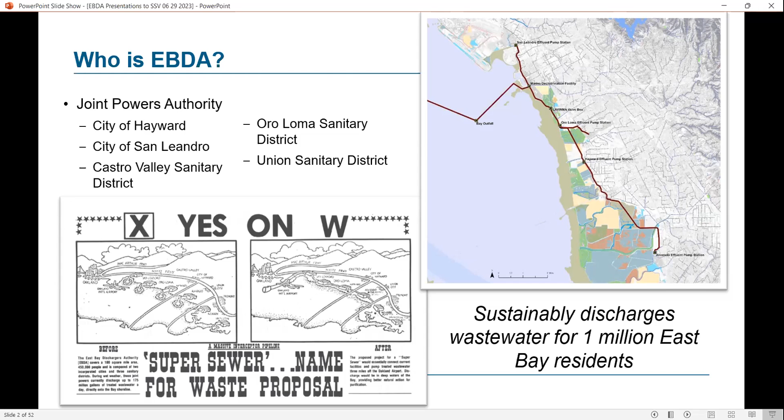Each of the treatment plants along the Bay Shore used to discharge treated wastewater directly to the bay, and this system was created to transport that sewage through a 7-mile outfall into the deepest part of the bay where there's additional mixing. But we're returning to more of a near shore discharge approach in certain elements, and we'll talk about that later today.

So we're going to start by talking about the Cargill partnership, and I'm going to turn it over to Don in a moment. Then we'll take some questions on that project when we get through the presentation, and then we'll move on to the horizontal levee project where I'll co-present with Heidi. So that's the run of show today. And with that, I'm going to turn it over to Don for an explanation of the Cargill EBDA proposal for enhanced processing and removal of mixed sea salts.

Thank you, Jackie. I just thought I'd give just a broad overview. Some of you may not be aware of what Cargill does. They are an ag, food, financial company, also work in the industrial sector, have operations in about 125 countries. It is privately held. The company was formed in 1865. Mr. Cargill bought a grain elevator, and his descendants are the current owners of Cargill. So over 158 years, we've grown to 155,000 employees.

And our purpose is to nourish the world in a safe, responsible, and sustainable way. And in fact, this project that I'm going to talk to you about is an example of that purpose. In the agricultural sector, we buy grains and oilseeds from farmers. In food, we supply food ingredients, sweeteners, texturizers. And in animal nutrition and protein, we provide feed, we provide protein products, beef, chicken, turkey to food customers, and financial and industrial is where our sea salt business is, actually part of the food business and the industrial business. So next slide.

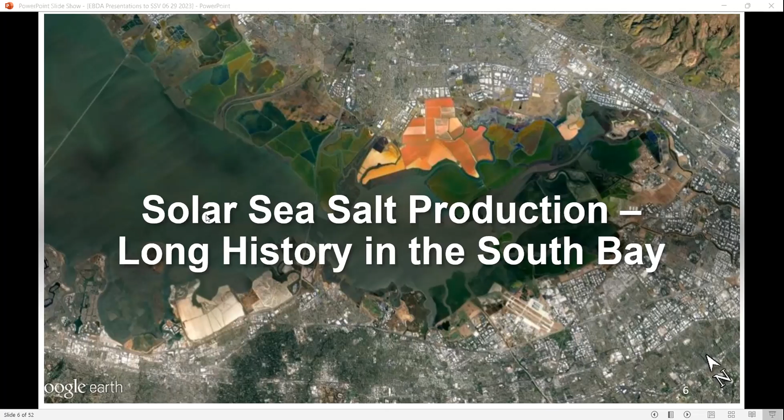And so we try to be good stewards in the Bay Area over the years. Leslie and Cargill have conveyed over 40,000 acres of shoreline property to federal and state agencies over the past 50 years. And the facility actually operates within the Don Edwards National Wildlife Refuge. So we go to the next slide. So that is a brand that Cargill operates for their salt. We don't have a lot of direct to consumer brands, but this is one of them. So if you see Diamond Crystal Solar Sea Salt in the store, it probably came out of our Newark facility.

So I thought I would, on the next slide, help you understand what the project is all about. I was just going to give a very high level overview of how you produce sea salt. It's a completely natural process. We only use the sun and the wind to evaporate seawater, which we pump in from the bay. So essentially where that X is, we bring in bay water and it moves through a series of ponds. The sun and the wind evaporate the water and the salinity increases. And then we move it to a next pond.

And so it goes through those rose colored ponds until you get to those green colored ponds which are called pickle ponds. And it's another name for increasing the salinity of the bay water that's in those ponds. And finally, those orange ponds is where we pump the brine into, and most of the sodium chloride will precipitate out, and it will settle to the bottom of the pond.

We pump out the remaining brine and harvest the sea salt. So the resulting brine, or leftover brine, we circulate that through the system again. But another product that we then extract, which is in those aqua colored ponds, are mixed sea salts. These are all the salts that are still left after you've removed most of the sodium chloride.

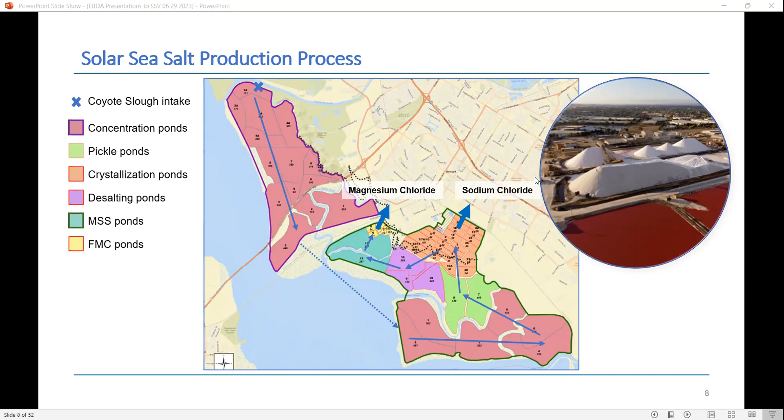But we realize that after we get as much out, we probably aren't going to be able to commercialize the remaining mixed sea salts. So that's what this project is all about. And as you can see, those ponds are fairly close to the bay. And so as part of our sea level rise adaptation plan, we're looking at removing those mixed sea salts from those ponds. So how do you do that? Before the Clean Water Act, we would discharge brine back into the bay, but we're no longer allowed to do that. So why don't we go to the next slide?

So again, this is part of our proactive sea level rise approach. Climate change, we realize, is going to impact all of us, and so we want to act before it becomes an issue. And so a part of our sea level rise adaptation plan is to remove those mixed sea salts.

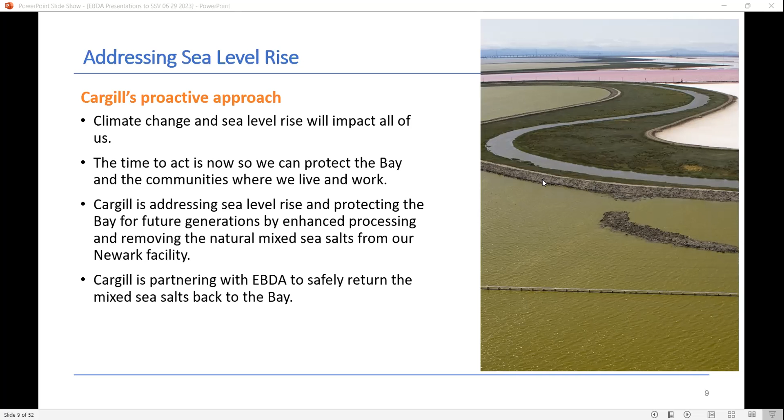And since the process that we have is completely natural, we don't bring anything into those ponds that hasn't just come from bay water. So it's completely natural, but we don't want this large inventory of these highly concentrated salts sitting near the bay. So this is why we're partnering with EBDA to safely return those mixed sea salts back to the bay. We'll go to the next slide.

You know, we looked at other options other than working with EBDA, and EBDA was clearly the most sustainable way of removing those mixed sea salts. I mean, we could have tried to truck it to a landfill or inject it into an underground well, or we looked at even putting it on a barge and sending it out, but none of those were really practical ways of removing the mixed sea salts.

And the advantage of working with EBDA is that we've got to dilute these mixed sea salts before we discharge them into the bay. We've got a large supply of wastewater effluent that we can use to dilute the mixed sea salts and then return them out into the bay. Why don't we go to the next slide?

So this is just a high level overview of what the project is all about. We will pump in some additional bay water in order to dissolve those mixed sea salts. We'll then send them through a pipeline that will connect with EBDA's wastewater effluent system. And then when it's mixed with all the wastewater effluent, it'll be diluted actually below the salinity of bay water. And then they can be safely discharged into the bay.

And so the challenge is we've got to get those mixed sea salts to the EBDA system. And so what we want to do is build a pipeline from our facility in Newark. It's about 17 miles or so up to San Leandro, where we want to connect. And we're looking at having a project labor agreement to build the pipeline.

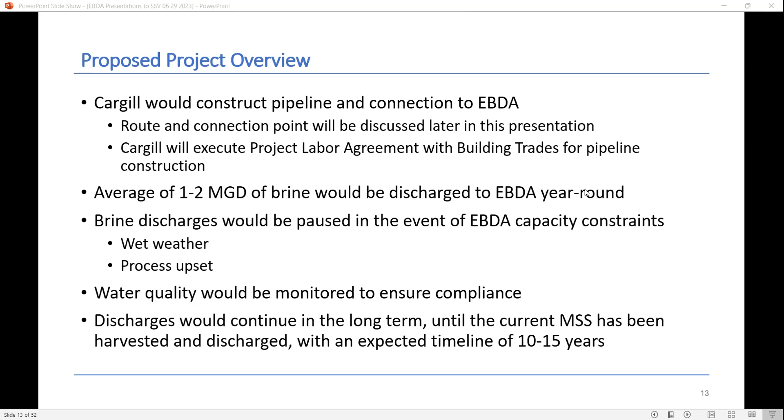And so essentially we'd be discharging 1 to 2 million gallons of brine year round. That's per day. And we would monitor water quality, and we estimate maybe 10 to 15 years before we would essentially remove the mixed sea salts from those 2 ponds that I showed you on that previous map. We'll go to the next.

But as we continue to work on the logistics of building that pipeline, working through other city projects, we've concluded that that really is an impractical way of routing the pipeline. It's really infeasible to do so.

Some of the reasons would be, I mentioned some other construction projects going on, Union City Boulevard. They're putting in a bike lane and doing some road work. They wanted us to coordinate our project with theirs because they didn't, of course, want us coming in 2 or 3 years after they just got done redoing Union City Boulevard and having us tear the road back up again to install the brine pipeline. That was an issue that we were facing. And they want to start that project later this fall.

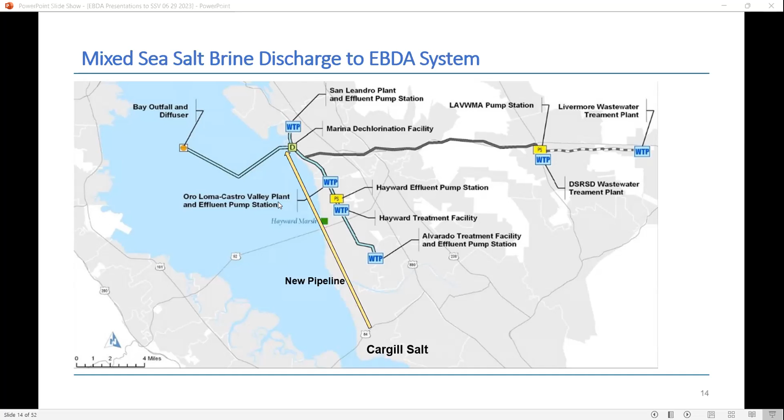So the next slide would be just kind of our goals for the project. We wanted to work with EBDA. Like I said, they've got a large, ample wastewater effluent to use to dilute our brine. So that was ideal that we be working with them. And it's a perfectly sustainable way of removing it. We don't have truck traffic. All the greenhouse gas levels for this option are much less than anything else that we had looked at.

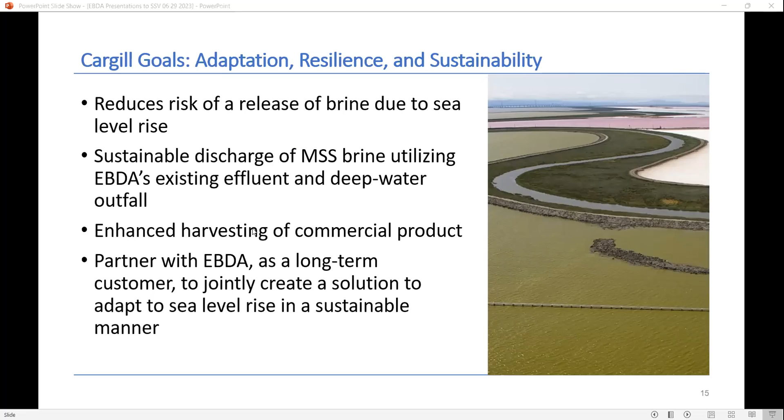And so then a natural question is, well, what's in this for EBDA? We've been putting a lot of effort into working with Cargill on this project and carrying this EIR forward. And so the drivers for EBDA and the potential benefits to us for this partnership are, first of all, we'd be sustainably managing and discharging a waste that's generated within EBDA's service area, which is consistent with our mission. We'd also be utilizing excess capacity that's available in our existing infrastructure.

Our pipe system is built to handle 189 million gallons per day, and on a typical dry weather day, we're only sending 50 to 60 million gallons per day through that system. So we have this excess capacity. What better way to use it than to work with Cargill to discharge these sea salts? We would receive financial compensation from Cargill for this. Sorry about that. And that would allow us to offset the money that's spent by our region's ratepayers on managing

EBDA's infrastructure. We may benefit from new or improved infrastructure that would be more corrosion resistant. So the portions of our system that will be touched by the brine would be hardened such that they'd be more resistant to corrosion, and that's a benefit to the infrastructure overall. And then we see it as our mission to be stewards of the San Francisco Bay, and so supporting Cargill's efforts to improve resilience of the bay from sea level rise by facilitating removing these salts is consistent with our mission as well.

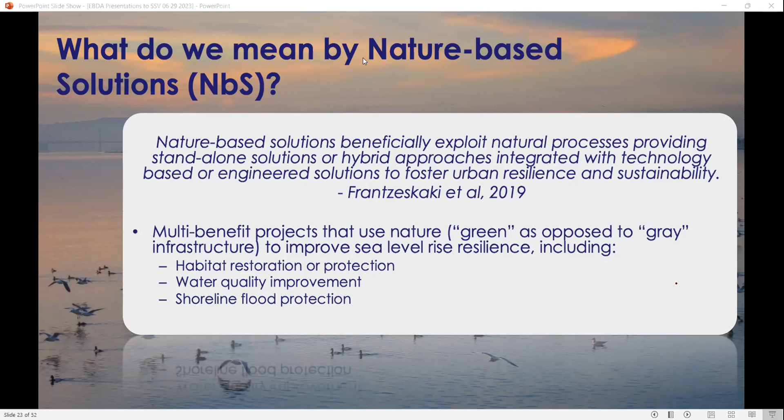So what do we mean by nature-based solutions? Here's a couple of quotes. Nature-based solutions beneficially exploit natural processes, providing standalone solutions or hybrid approaches integrated with technology based or engineered solutions to foster urban resilience and sustainability. And we can also think about nature-based solutions as multi-benefit projects, as places where we're trying to stack multiple functions and really maximize benefit, utilizing natural systems to improve our sea level rise resilience. And this can include green approaches. There's always space for gray approaches. So it's not to say that we don't think there are parts of the shoreline that will require those traditional approaches, but we do look for nature-based approaches where we can. Next slide.

So just taking that concept into our policy and planning landscape today, that's informing why we're working to advance these solutions right now. We're really seeing an increasing urgency to advance our projects using innovative approaches. Climate change and other drivers of change create multiple stressors at once within our shoreline. And so really trying to maximize benefit is very urgent and pressing for decision makers today.

And we do have multiple sources of regional guidance that really drive us towards these types of approaches. The San Francisco Estuary Partnership puts out the Estuary Blueprint, which is a roadmap for the health of the estuary and really emphasizes nature-based approaches. And then the Bay Conservation and Development Commission, BCDC, led a multi-stakeholder process called Bay Adapt, which put out a joint platform for strategies for the future of our rising bay and really emphasizes nature-based approaches.

We also have state and federal guidance, including President Biden's executive order, really seeing these nature-based approaches as the default. We want to start there and see what we can do before moving to traditional gray infrastructure approaches. Next slide.

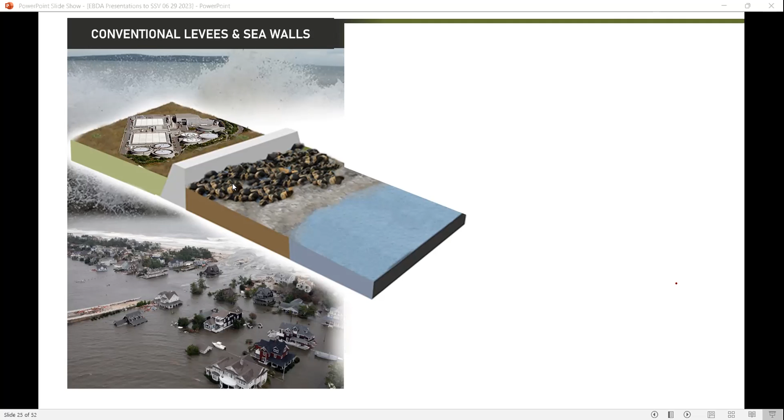This is a schematic that talks about what that can look like in reality on the shoreline. What we have on the left is a conventional levee and a seawall. The image that you're seeing is a wastewater treatment plant facility with a traditional seawall that is then protected with riprap on the bayward side and then going out into the water from there. This conventional approach is susceptible to failure as it's not able to dissipate wave action all of the time. And it's only serving one function. And generally speaking, it's doing it pretty well. It's protecting that infrastructure behind the seawall.

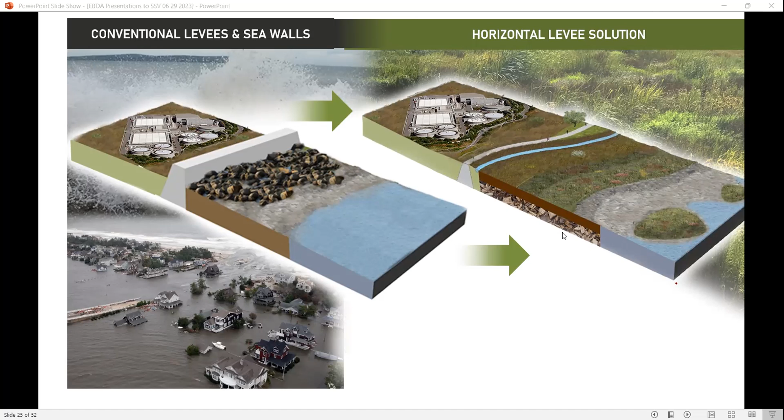But a horizontal levee solution is able to do that in certain locations while also providing other benefits and perhaps even having a more resilient system for protection. So this is the horizontal levee. And Jackie's going to be talking about this a lot more in terms of how that's being carried out on the shoreline. If you click through a couple more slides, it still has that same existing levee, that same flood protection system, but it's supporting that with native vegetation that can provide that wave attenuation and really handle the shocks to the system.

And that vegetation obviously is providing habitat for native species. It's improving our water quality. In a horizontal levee in particular, we're also using this water treatment layer that goes below ground. So it's also providing a benefit to that wastewater treatment plant by allowing it to discharge the treated wastewater down below ground through the system and then out into the bay, improving water quality in the process.

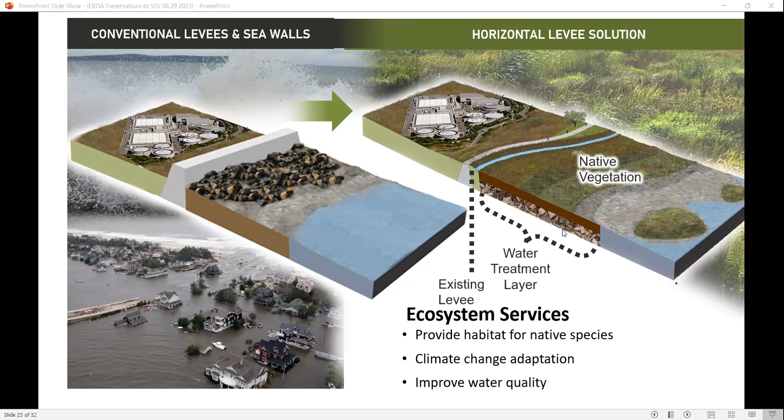And as Jackie's going to talk about, these below ground treatment systems have a higher level of treatment and removal of contaminants than we see in traditional wastewater treatment for things like nutrients and contaminants of emerging concern. Next slide. So that's horizontal levees.

And really, when we think about what this boils down to, it's reimagining wastewater as a resource rather than something that we're just discharging out through a pipeline, which, like I said, in itself is providing value. But when we're thinking about every inch of the shoreline being critical, we can reimagine that as a resource in certain areas.

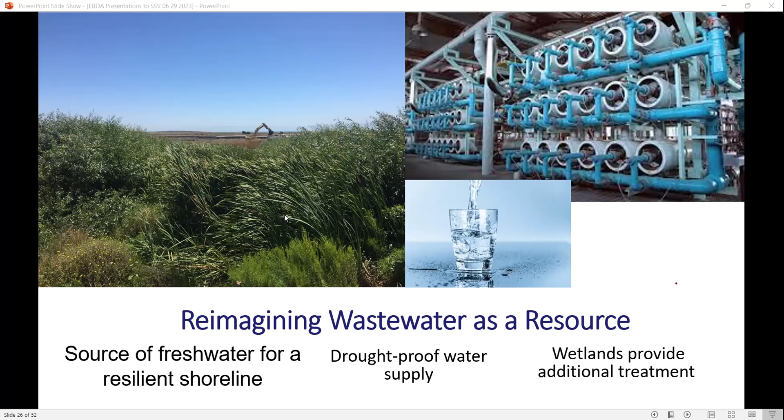So a source of fresh water for a resilient shoreline, drought-proof water supply, and also, like I mentioned, the ability of wetlands to provide this additional level of treatment before it's going out into our bay, which is really beneficial, especially if you think about the fish die-offs that happened in recent years and some of the impacts of nutrients on our estuary. Next slide.

It's also reimagining wetlands as a place for people and nature. Wetlands provide so many benefits to our communities. And so it's really trying to maximize that and maximize the genius design of nature to provide these benefits to our communities. So really thinking about community and tribal benefits, protection from climate-related hazards, and also future-proofing for nature. Next slide.

So in the thick of trying to bring all of these great concepts down to the shoreline and developing projects, we are working very closely with the partners I showed in that opening slide, as well as many others, on some of these key implementation challenges. These are designs that are not the default, they're not the status quo, and a lot of our systems are not necessarily designed for them yet. And so we're really trying to think through some of these implementation challenges right now.

The first one that I have there is speed and scale. So just knowing that these types of projects really require agencies to be thinking about and buying into benefits that maybe are not within their scope. Maybe they've been providing public access and now they're suddenly thinking about protecting infrastructure or water quality or hydrology or different components that have not traditionally been within their scope.

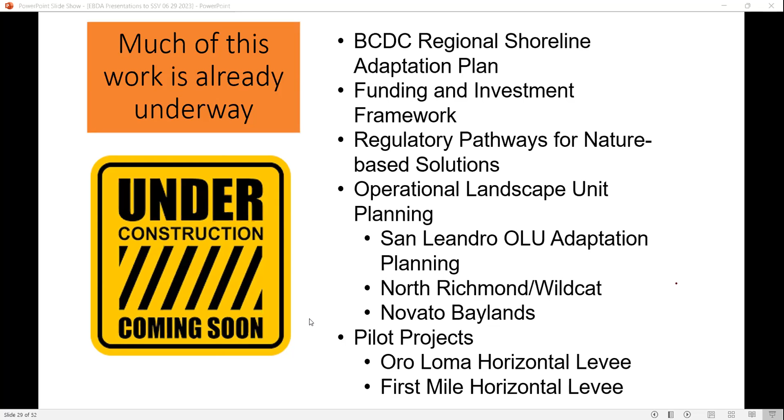So with that, I'm going to hand it back over to Jackie to talk a little bit in more depth about this stuff. Thanks, Heidi. So what you're looking at here is the Oro Loma treatment plant and the Oro Loma effluent pump station that belong to EBDA. Also, I should have noted behind me is EBDA's outfall, that same outfall that we are going to be discharging Cargill's brine through and that our wastewater flows through. And so I'm going to talk about a project that we've been working on to implement the solutions that Heidi just talked about.

So first I'll touch a little bit on the horizontal levee demonstration project, and many of you may be familiar with this project, but I'm going to go kind of from the beginning for those that aren't.

I will also offer that I have my contact information at the end of this slide deck, and if folks are interested, we are happy to give tours of the demonstration project to really allow folks to see it firsthand and get a better understanding of what we're talking about. So feel free to reach out if you're interested in coming to see it.

So this is the Oro Loma wastewater treatment plant located in San Lorenzo that discharges generally through the EBDA system. But a portion of that effluent is diverted to this wetland treatment basin and the horizontal levee demonstration. This is a pilot scale facility that we really use as a living laboratory to test some of the treatment concepts that we've been talking about with the horizontal levee, so that we can do it in an experimental setting, so that when we start to build up to full scale, which we'll talk about more in a moment, we have a better scientific understanding.

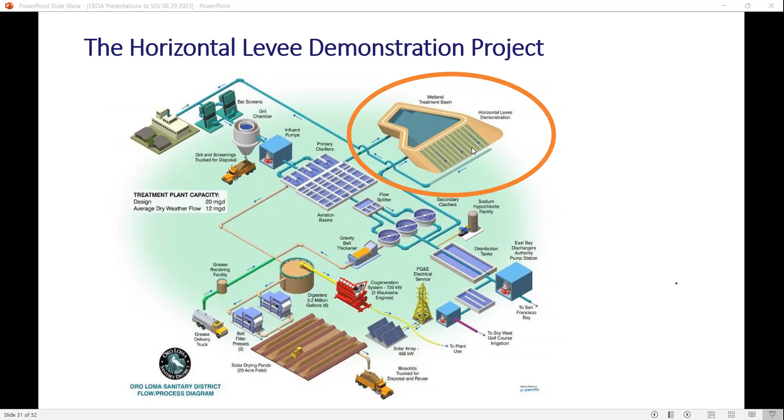And so the work at the horizontal levee demonstration has been primarily carried out by Dr. David Sedlak at UC Berkeley and his students. So there's the horizontal levee demonstration, and here's what it looks like in practice. This was taken a few years ago, and the vegetation has changed a bit in the interim. But what you're looking at is actually a series of individual cells. Again, this is part of the experimental design.

It was created with these different cells so that we could test different types of vegetation and different types of substrate. When we say substrate, I mean what's below the vegetation that we're actually filtering the water through to achieve treatment. So we have fine substrates, coarse substrates, different cells with willows, cells with other native wetland plants, to try to understand where we would see the best treatment of wastewater through the system.

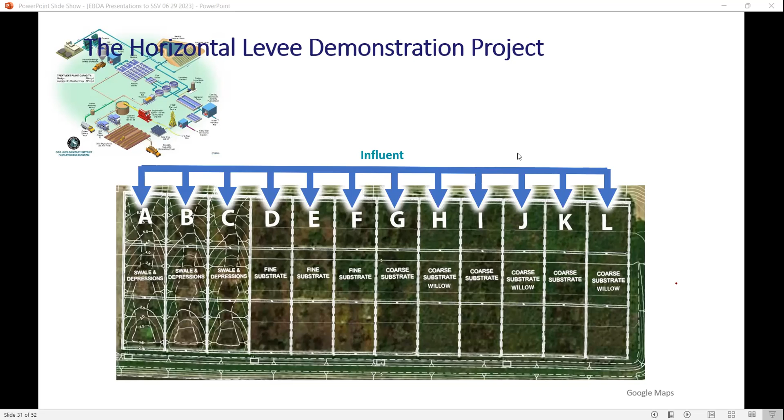So what we do is we put influent, which is actually the effluent from the wastewater treatment plant. So it's secondary treated wastewater that goes into these cells at the top end of a 30-to-1 slope. And then it goes out and the wastewater is collected and sent back to the treatment plant. So this is purely an experimental system. It's not currently connected to the bay, but it allows us to study.

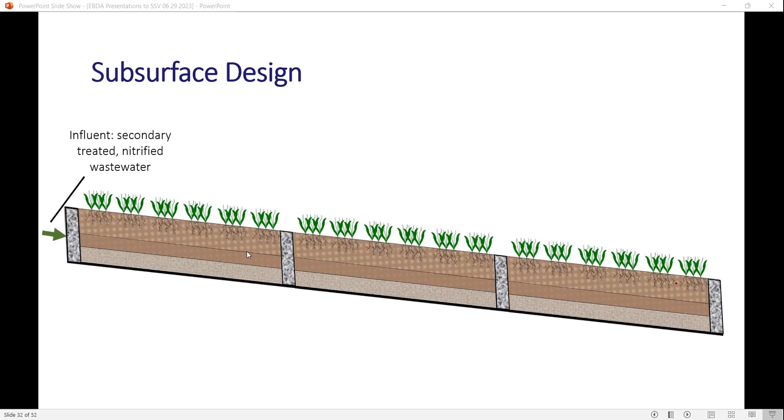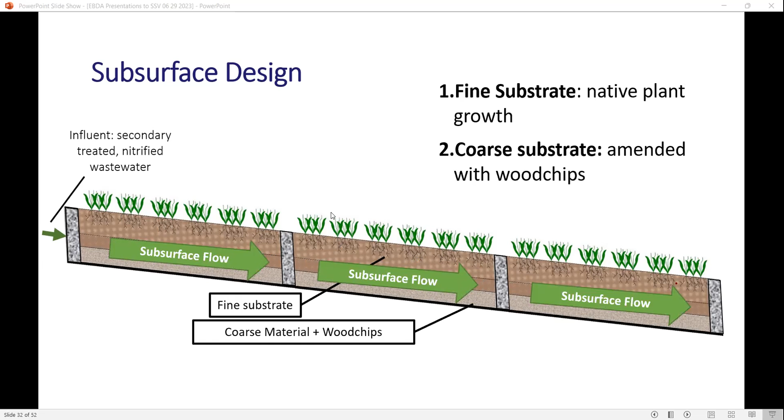So in terms of the subsurface design, as I said, we put secondary treated nitrified wastewater into the subsurface zone below the plants. We have fine substrate with native plant growth. We have coarse substrate where we've amended it with wood chips to facilitate biological action, basically the microbes treating the wastewater. And we try to get the wastewater to flow through that subsurface to achieve treatment.

So the nitrate is removed within 1/5 of the built capacity. And so that has implications for how we build this in the future. And organic carbon amendments can sustain denitrification for over 50 years. So that's one of the questions that we've been working to answer: how long will these systems last and what sort of O&M, operations and maintenance efforts might be required to sustain the results. So what we concluded from those first phases of work is that the horizontal levee may be able to handle higher contaminant loads because it's so effective.

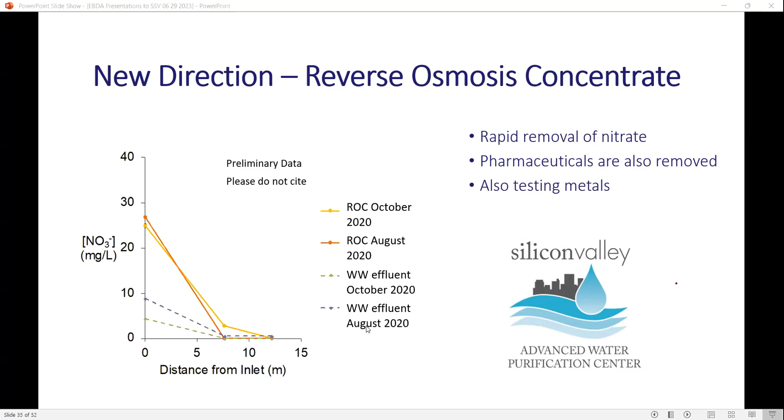So what's next is what we're calling Horizontal Levee 2.0. So with state grant funding in partnership with San Francisco Estuary Partnership again, we are redesigning some of the cells, basically ripping out the first 3 cells and testing new things in this living laboratory. So things that are going to be tested in this next phase, and this is what it looks like under construction. This was taken about a month ago. We're testing a steeper slope.

One of the challenges with horizontal levees is scale. So the first mile project that we're going to talk about in a moment is a mile of levee, and we think we could only put about 500,000 gallons of wastewater through that. And the Oro Loma treatment plant, as an example, processes about 12 million gallons per day. So we need to find ways to tighten up the space requirements. And one way of doing that is by increasing the slope. And we think that that will be successful given that most of the treatment happens in that first portion anyway.

We're also testing different treatment zone thicknesses. The thicker the treatment zone, the more expensive it can be and the more maintenance that might be required. So we're testing different ways of configuring the treatment zone to try to make it more cost effective. And then we're also trying to augment the treatment zone in certain cells with a product called FLUORO-SORB that is intended for PFAS removal, and really understanding the fate of PFAS in the horizontal levee.

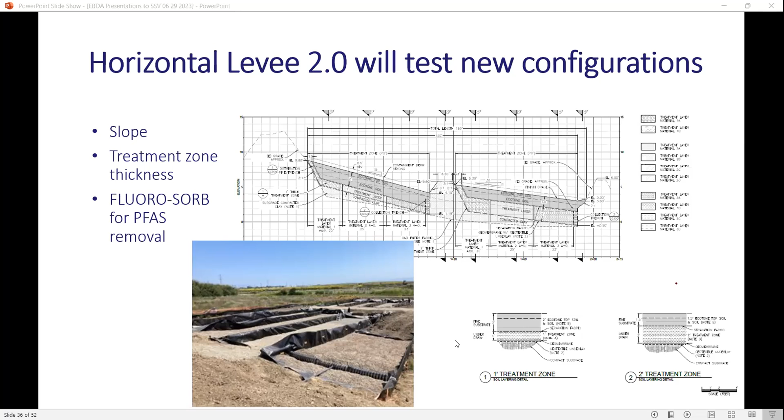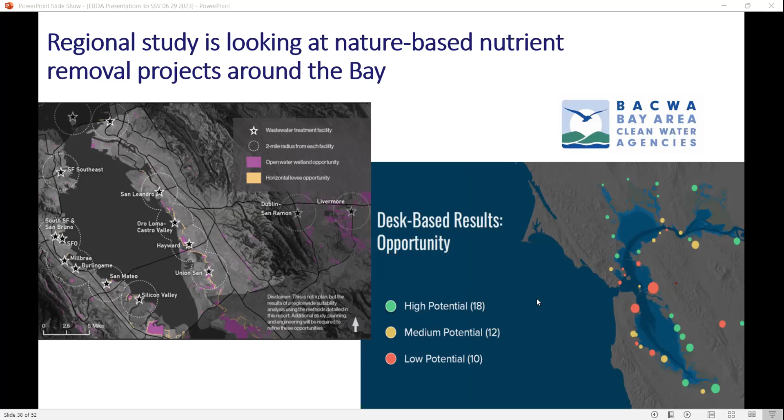And just a word of thanks to the San Francisco Bay Water Quality Improvement Fund. I know there's been a lot of press in the past couple of days actually about the influx of additional monies to the Water Quality Improvement Fund. We're really excited about that, and that EPA funding has been instrumental to moving these concepts forward, working with SFEP.

And this was a really great process that engaged stakeholders and the public in weighing the different benefits and trade-offs around habitat creation, recreation, where should the Bay Trail go through this area as sea level rises, and how can we protect critical infrastructure like the wastewater treatment plants. So a really good exercise to come up with this master planned concept.

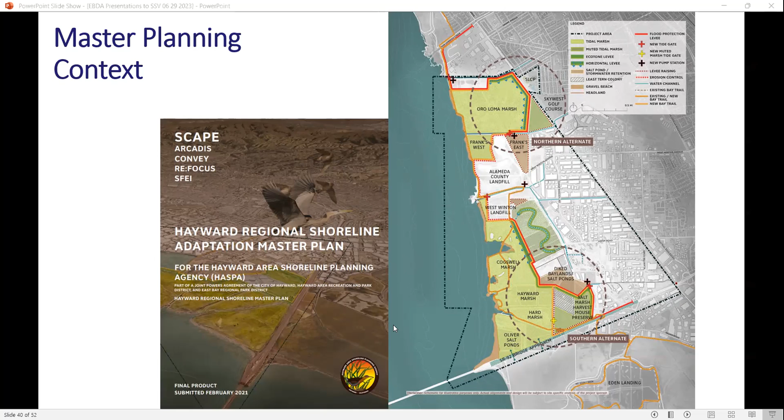So the first mile project itself would consist of a horizontal levee that's shown here, and the water source could either be treated wastewater from Oro Loma, which was the original concept, or potentially stormwater from the surrounding areas that otherwise wouldn't be treated. And we would manage it for habitat benefits, trying to mimic natural subsurface hydrology, like Heidi was talking about, that biomimicry concept. We'd also be looking at widening Sulphur Creek in the south, and converting some of the upland to marsh areas.

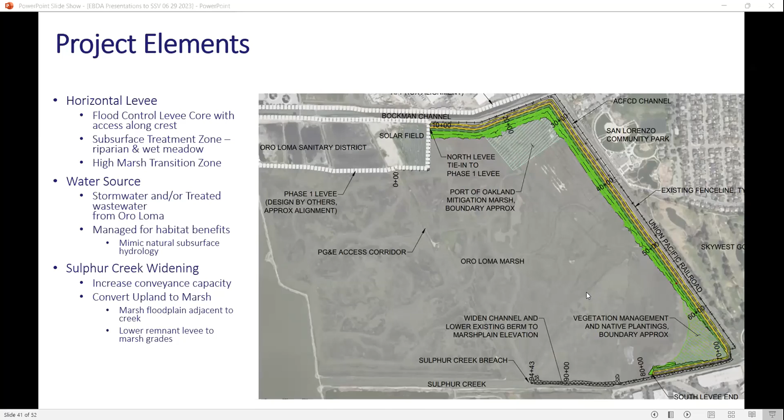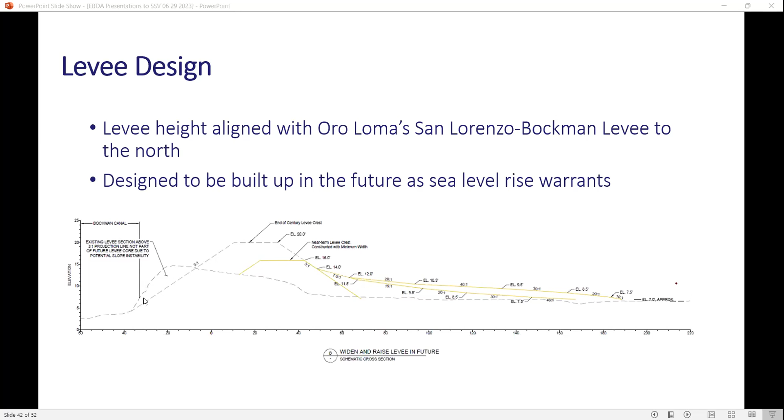So some of the benefits: we would expand upland and transitional habitats for endangered species, provide flood protection for San Lorenzo and Hayward behind the levee, provide stormwater treatment and/or wastewater polishing, and sea level rise adaptation. What's unique about these solutions versus a seawall is they grow with sea level rise, is kind of the idea. So it allows the marsh to transgress upslope, but with sediment deposits over time as the sea level rises, building organic soils to keep pace with sea level rise.

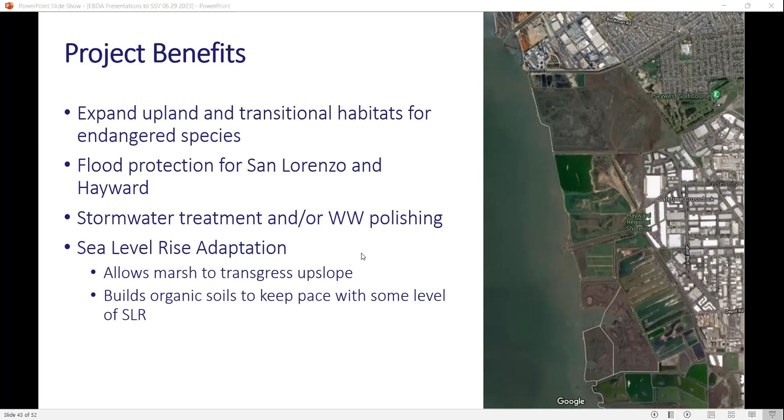There are permitting challenges and mitigation requirements. So when you fill in an existing wetland, even if it's to protect that wetland from sea level rise in the future, there's still, under current regulations, the requirement to mitigate for that. So I'll touch on that a little bit more in a moment. There's stormwater that needs to be managed through or around the levee, and then who, in this mix of partners, would be responsible for operations and maintenance.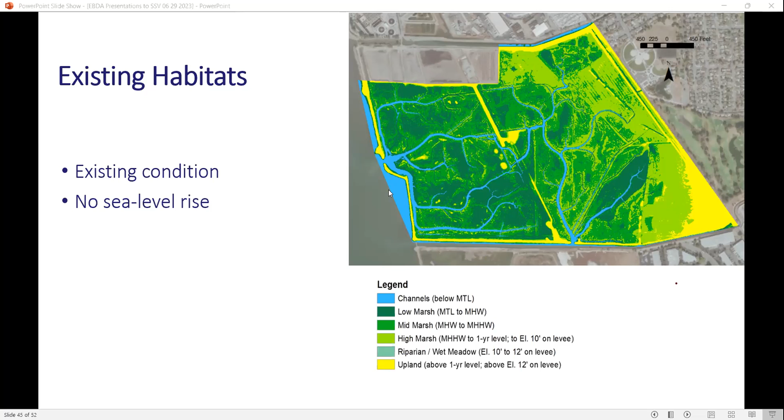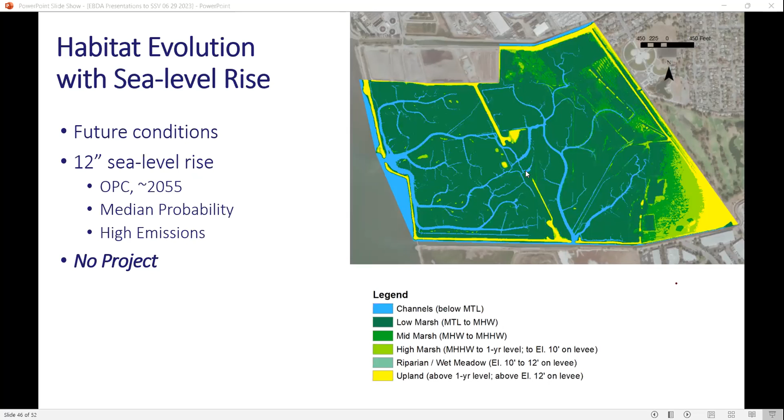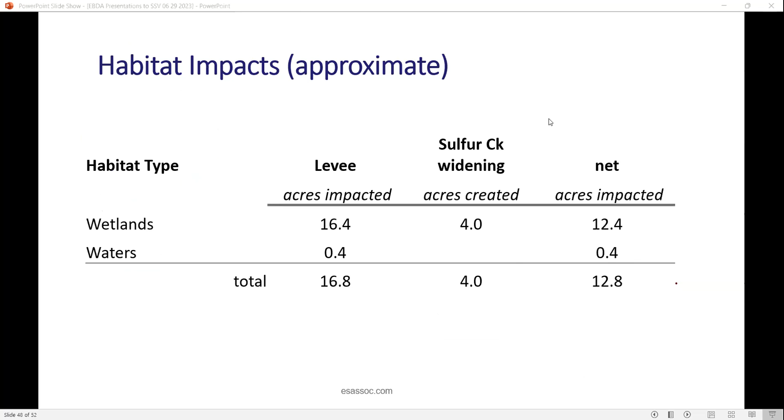So the existing condition: no sea level rise. These are the different types of habitats, and you can see with sea level rise, the habitats are going to change with or without us. This is the no project alternative. With the project, then you have a little more yellow. You have a little more upland habitat for those critters. So the net habitat that's impacted is 12.8 acres in this case, and that's what we would be required to mitigate unless we can find some framework for considering future conditions.

So because the first mile project's not permittable in its current form due to the wetland impacts, we're looking at expanding the scope to include some mitigation adjacent. So the master plan that I showed earlier identified these locations called Franks West and Franks East that are ripe for future restoration. And so we're looking at moving those restoration projects up in time to pair them with the first mile project and provide an offset.

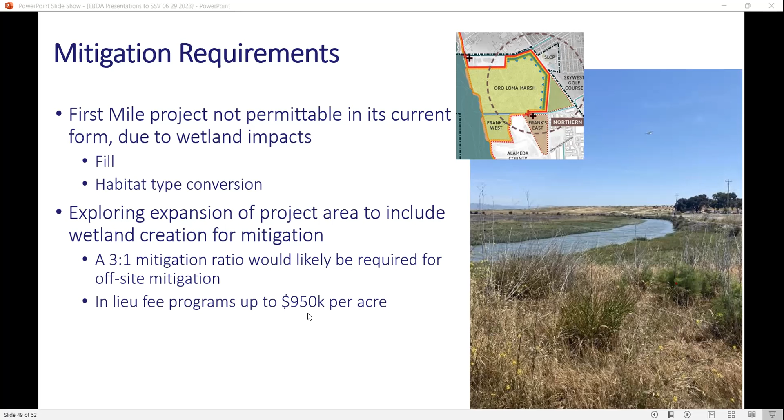Otherwise, we'd be looking at potentially almost $1 million an acre to mitigate for the impact, which really makes the project cost infeasible because the project itself is expensive and challenging to fund. If you add the mitigation, it just drags it down.

So in terms of the next steps for this project, we are in the process of completing the 30% design. ESA is the consultant that's working on that design. We're also working with another consultant, Nate Kaufman, to develop renderings that will really allow stakeholders to better visualize the project, understand what it will look like and feel like. And we're hoping that really helps with these conversations about the impacts versus the benefits.

We're progressing these mitigation concepts at the sites to the south that I mentioned, continuing to work with the Bay Restoration Regulatory Integration Team, or BRRIT, on the permitting questions and challenges, and also using this as an example as we work through some of the broader regulatory discussions and the regulatory pathways project that Heidi mentioned.

We're also developing a leadership and governance strategy. EBDA has been the champion of this project as a benefit to the Bay and the East Bay shoreline and protecting our infrastructure and improving water quality. But at the end of the day, it probably doesn't make sense for EBDA to be the entity that builds this. It's not in our core scope. And so who should be the entity to build it, and what sorts of partnerships are needed in order to get this project implemented and to agree to the operations and maintenance responsibilities.

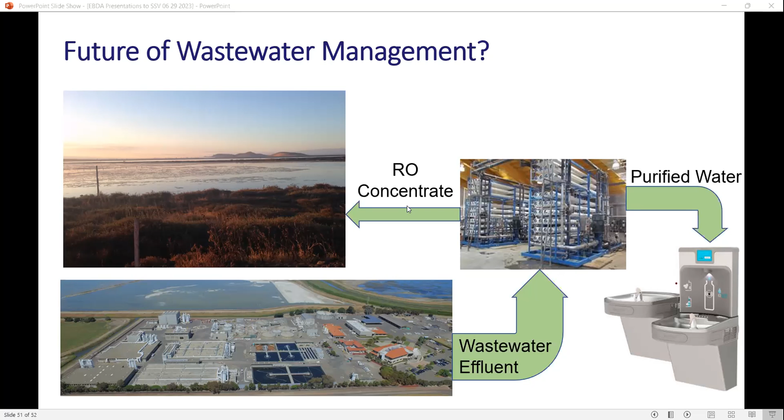So I rushed through a little bit of that so that we could have time for questions, but happy to go back to anything and answer what questions folks might have on this project. So let's see. Yeah, Jackie, I think it'd be good to go through the Q&A.

There's 4 Q&A submissions. So the first question that I see on this project is, could the below ground treatment layers that Heidi mentioned as part of nature-based solutions address chlorides? Concerned about saltwater intrusion into groundwater due to sea level rise.

Potentially. What we've been looking at in the horizontal levee is a saline environment or an estuary environment, so using native plants that would already be found along the shoreline. And the water that we're putting in there, even if it's reverse osmosis concentrate, which is pretty salty, it's still lower salt than bay water. Whether you could use a tool like this to filter the salt before it gets to groundwater is an interesting question, and I don't know if that's been studied. I don't know if Heidi has any thoughts on that.

Yeah. Jackie, actually a follow-up question I had, in terms of Oro Loma, the pilot project, and what is envisioned with the first mile. You talk about native plants, but these are not like adulterated native plants, like it isn't a phytoremediation issue or anything, right? This is kind of off the shelf, if you will, native plants.